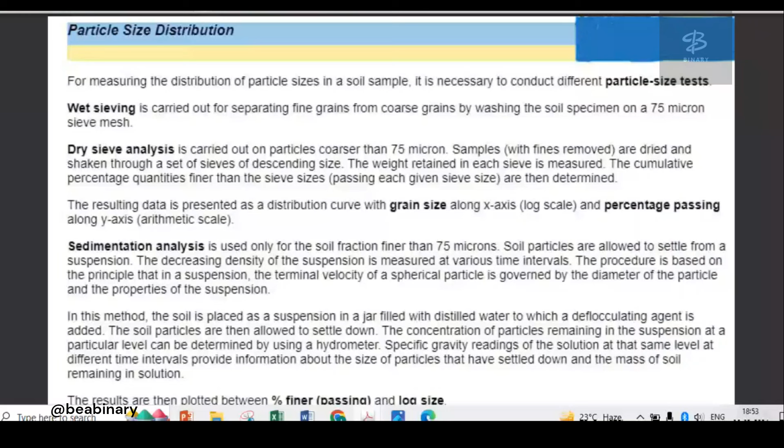Now, coming to the sedimentation analysis. Sedimentation analysis is used only for the soil fraction finer than 75 microns.

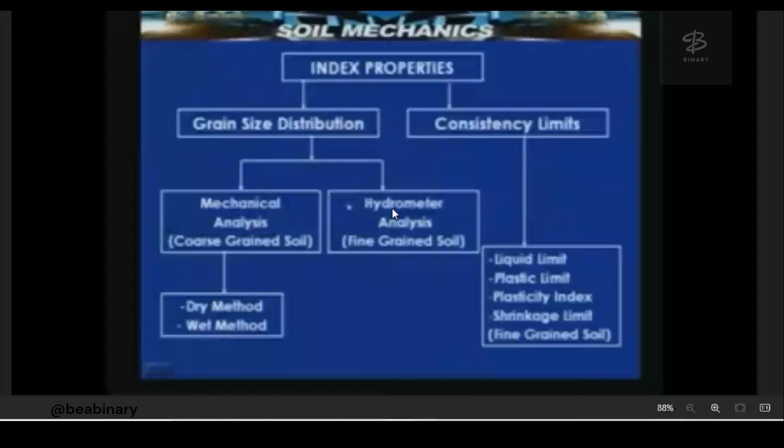The concentration of particles remaining in the suspension at a particular level can be determined by using a hydrometer. Specific gravity readings of the solution at that same level at different time intervals provide information about the size of the particles that have settled down and mass of the soil remaining in the solution.

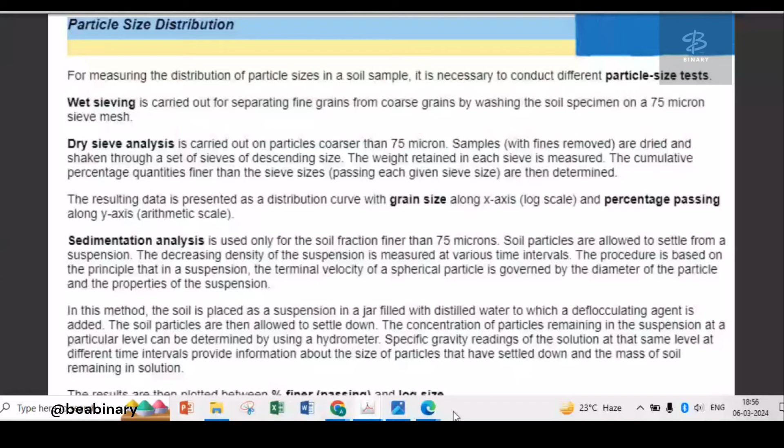Soil fraction finer than 75 micron size is kept in suspension in a liquid. Usually water is taken, we suspend it in that. The analysis is based on Stokes law, according to which the velocity at which grains settle out of suspension, all other factors being equal, is dependent upon the shape, weight and size of the grain.

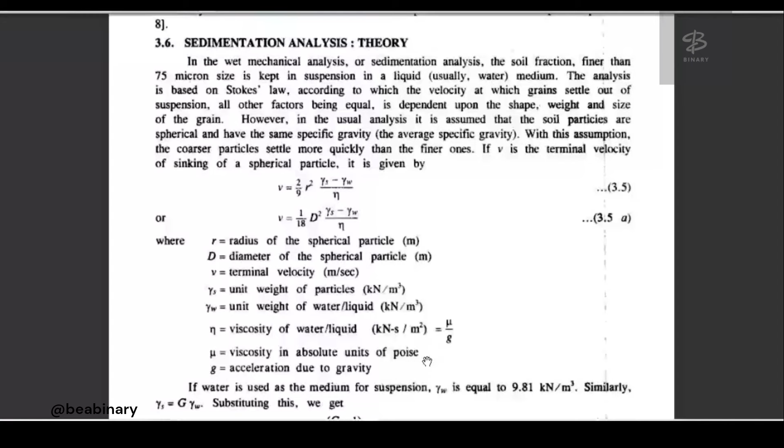All the things will be known. If water is used as the medium for suspension, γw = 9.81 or 10. Similarly, γs = G × γw.